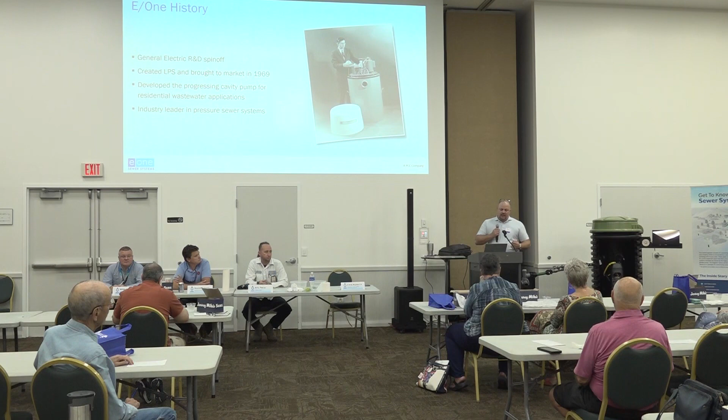We are recognized as the industry leader in pressure sewer systems, but I just kind of want to pause right here to not only point out that we have a national presence, but also an international presence. We do this all over the world. Our company is in 46 countries, I think now. Somewhere in the world, there's another brown bag event taking place where someone from our company right now at this very moment is talking to a group like yourself about pressure sewer systems and the benefits that they bring.

But there's three primary types of systems. Jenny alluded to it earlier. We've got pressure sewer, we've got gravity, and we've got septic, various forms of septic. And all three of those types of collection systems are present here in Port St. Lucie.

So just to cover kind of our mission as a company, we provide complete and accurate design recommendations for pressure sewer suppliers, engineers, and customers. So what that means is that we don't just provide a product and cross our fingers and hope that it works well. We work with the engineers, we work with municipalities like Port St. Lucie to make sure that we understand the application, to make sure that we're designing the system in a way that it can be optimized so that it's invisible to the homeowner.

Having been doing this for a number of years now, it's not uncommon for me to get a phone call from an end user, because our name and information's right on the website, but a homeowner might say, hey, I built this house back in 1990. I had no idea that it even had this pump system. That's not a good call because there's a service issue. We never want there to be a service issue, but it's good that it's been 3 decades and it has not caused an issue whatsoever.

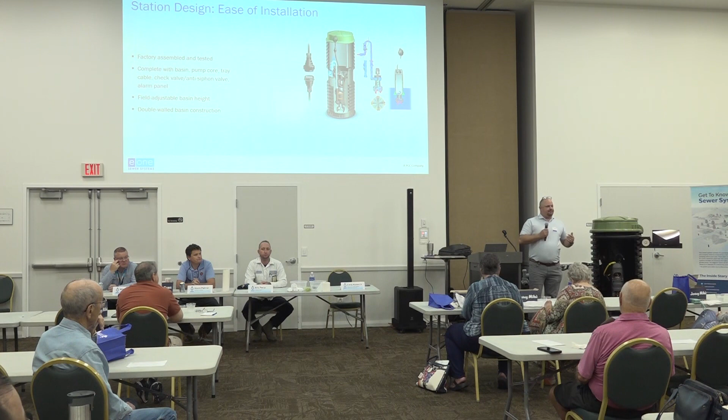We spent a lot of time and resources on oversight of installations as well. We've got Joe Papadakis. I see your hand there, sir. I'll get to you. Joe Papadakis is our local liaison to the city of Port St. Lucie. He works a lot with contractors who put these systems in. So there's a question? Where do you manufacture? New York State. Yep, New York State, upstate New York, from day one. Still made here in the USA.

Also, serviceability. We want to make sure that whoever's servicing this entity can do it in a cost-effective, efficient manner. And we want to make sure that simplicity is part of every aspect of the design. So in many cases, it's the utility or the municipality that does the service work. In some other cases, it might be a private contractor or it might be a plumber.

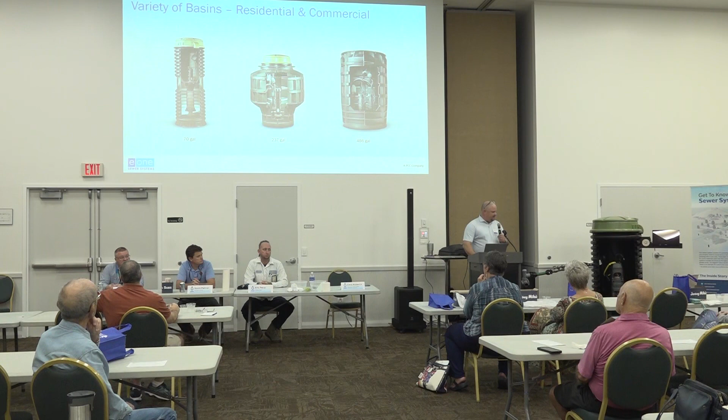In all three of those cases, we want to spend time with the service entity, educating them on how to do it the right way and making sure that everything is as simple and predictable as possible from an oversight standpoint. We make a variety of different basins for commercial applications. This simplex residential unit is what's used here in the city.

And we have a lot of protective functionality for our panels as well. Things like surge protection, lightning protection, brownout protection, overpressure protection, all those things are featured on our panels. And one of the really cool features that we've come out with in the last 5 years or so, 7 years now, is the advisor system. It's a remote system, an alarm system that notifies the service entity of an issue with the pump, often, if there is one, prior to the homeowner even being aware of it.

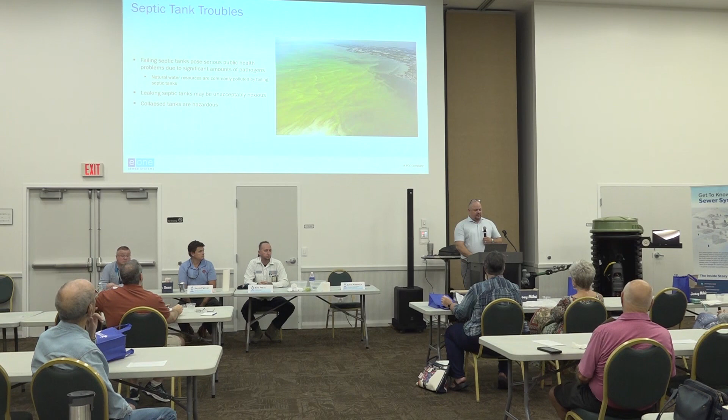Why do we look at septic to sewer? Why do we look at using pressure sewer as a means of solving water quality issues, which we hear about every day in the news? We know in the state of Florida and beyond, leaking septic tanks are leading to algae blooms and water quality issues. If you open up your phone or the television, you'll see on any news outlet, water quality issues are now really front and center. We're hearing about them on a daily basis.

Pressure sewer systems are one of the most cost-effective and efficient ways to deal with leaking cesspools and septic tanks. In the city of Port St. Lucie, how many septic tanks are out there that still have to be replaced? 14,000. Just under 14,000. And 4,000 that are in close proximity to a waterway. So those would be considered targets for a pressure sewer system as well.

So I want to just deal with some of the myths and misconceptions as we're wrapping it up. We have to go a little bit quicker here. There's a lot of content, so apologies for that. But just hitting the high points with gravity sewers, one of the myths and misconceptions is that once they're installed, you don't have to ever maintain them. These gentlemen will talk more about what they do to maintain that system. There's lots of regular maintenance required with them. Lots of costs required with them.

You also have some vacuum sewers down here in this part of the country. One of the misconceptions is that they're sealed with no infiltration, that they're simple to operate and troubleshoot, and that multiple homes can share a valve chamber. With pressure sewers, one of the myths and misconceptions is that constant maintenance is required. This is not the case with an E/One system, and that it's expensive to operate. We know through third-party data that for about $30 a year, you can own and operate an E/One system, which is markedly less than any other type of collection method out there.

So with that, I'll leave it open to any questions that you folks might have. Yes, sir. No, it has a backup generator that can be hooked up that would evacuate the station. In the case of Port St. Lucie, they take responsibility for that, and they do a great job with it. Budget price for something like this, for the equipment, say about $7,000.

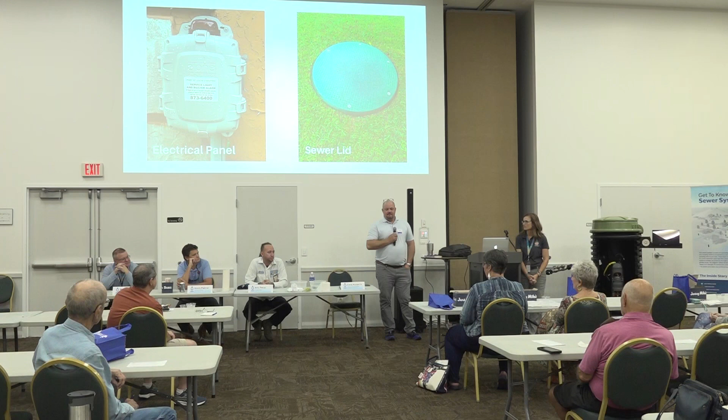Well, thank you very much, guys. Appreciate it. Thank you so much. Safe travels. So we got to get Chris out of here. He's got to catch a flight. So, all right, let's see here.

All right, so real quick, I know that we're eating. I feel like most everybody's wrapped up, but we're going to do a quick flush test. So hopefully everyone is aware of what you should flush and what you shouldn't flush. Obviously, we know what we should flush, right? Okay, cool. I talk to kids a lot, and they love when I talk about what you should flush, but I'll spare you folks here today. So we're gonna do a quick flush test, okay?

So I've got my 2 toilets up here, my two bowls of water. I'm gonna show you what happens when toilet paper is flushed. I'm gonna simulate a flush with a whisk here. And this toilet paper, just with a few whisks, is doing exactly what it should be. It's breaking down, right? I put about 3 squares in there. It's not squares anymore, right? It's like a little snow globe in there. That's exactly what toilet paper should do.

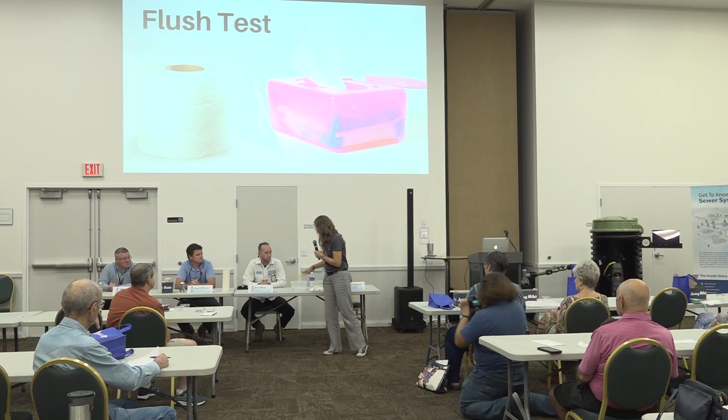Now we're going to talk about flushable, in quotes, flushable wipes. So I've got my flushable wipe here. I'm just going to show you what happens when I flush this wipe. Oh, I got to flush it again. Hang on. Not much happening. It's not breaking down like the toilet paper did.

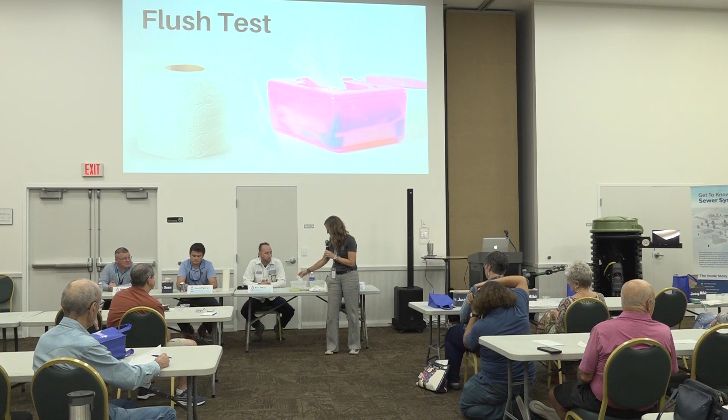All right, I'll show you a magic trick. Now these have been in my display box for a long time, so we'll see if it works. But abracadabra, still intact, folks. The label says flushable, and it's right. Technically, this is flushable, but so is my wedding ring, right? So is a $20 bill. You can flush all kinds of things, but will it break down? And the answer is no.

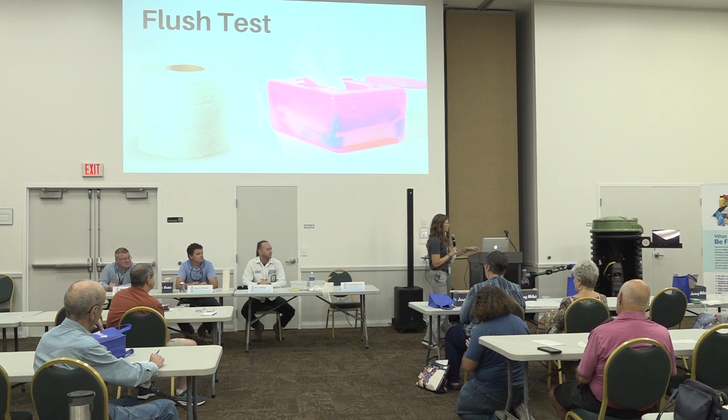If you guys leave with any information today, please just remember, don't flush these, no matter what the label says. We've got a list up here in case you want to take a picture of it. That's everything that you should not flush. So this was a couple years ago. Remember COVID? Remember when we couldn't buy toilet paper and had to order it on Amazon? We tried to get ahead of it as much as possible because we knew that with people not being able to buy toilet paper, they were going to turn to these.

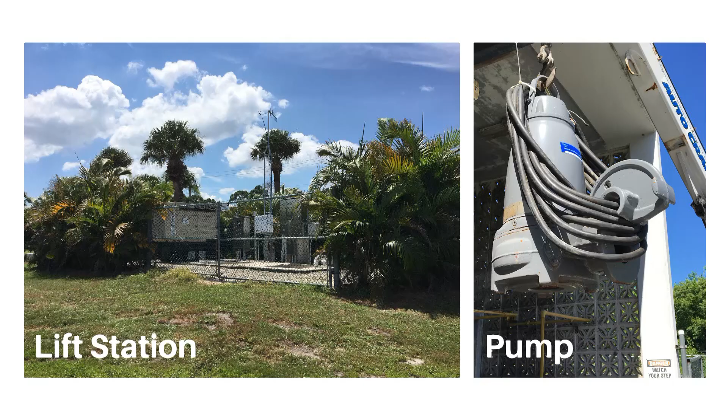Lift station. Thank you, Jenny. Just a quick brief about me. My name is Eric Perez. I've been with the city for 23 years, and 18 of those I've worked on lift stations. You might know a lift station if you're driving through a neighborhood or walking your dog. It's usually a fenced-in area with a driveway and an electrical panel with an alarm. Sometimes it might smell a little funny. Sometimes it doesn't, and that's some of the odor control that we try to have.

To the far left is what the panel looks like along with our communication. So if there's a failure within the station, it will let us know, usually through a text message or an email. All the sewer lines within the city, whether low pressure or gravity, go to a lift station. It fills up to a certain point, and then it pumps down to the next lift station, and so forth until it makes its way to the plant.

Things about a lift station: generally, in the Tradition area, our deepest lift station is 32 feet. We have roughly 315 lift stations throughout the city. If you have a septic tank, it doesn't go to that. Just the gravity sewer and the low-pressure systems go to a lift station. And same with the wipes. We have trouble with wipes. They get jammed up in our pumps.

Generally, in a lift station, we have 2 pumps. The best way to describe a lift station is it is very similar to this. Usually we just have 2 pumps in there, varying in sizes from 5 horsepower up to 50 horsepower.

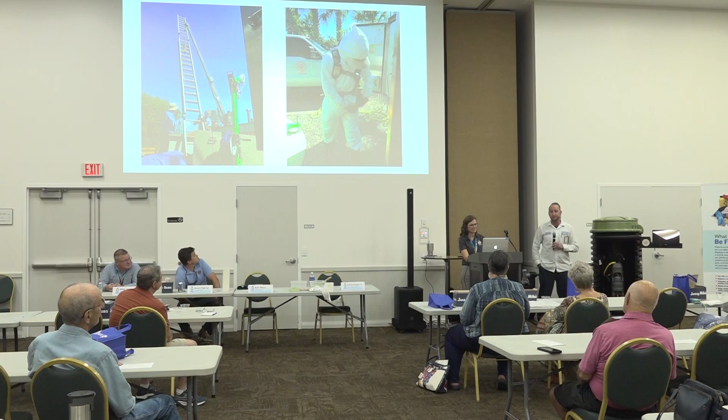And once it fills up to a certain level, then it pumps out into the main and further on down the line to another lift station, and so forth. And then it makes its way to the plant. Some of the things we deal with are a lot of wipes, grease, stuff like that. Same stuff that can't be flushed still makes it to our lift stations eventually if it gets past the residential system. As far as gravity goes, in my opinion, it's always been the favorable system we've had. It has less failure in general, but it's more economical to do a low pressure system in the state of Florida because of our high water table.

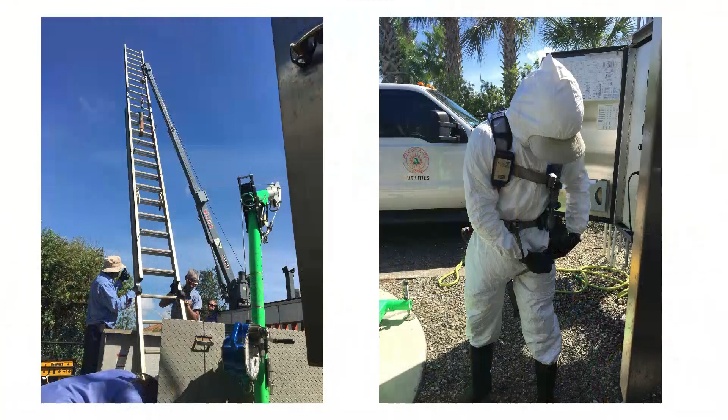Okay, so this is me. Yeah, that's me, I'm going into the lift station to make a repair. That one was actually about 28 feet deep. I don't recall what the repair was, but generally what's called a discharge leg, where the pump will push the fluid up and out into the main, will have a failure, and we need to go inside and make a repair. Sometimes we have to go all the way down to the very bottom, or sometimes we go to the top.

So when the lift station fails for whatever reason, a neighborhood can have a slow backup. Absolutely, yes. And all the neighbors may say, hey, I'm not flushing, right? That is correct. So it can happen in a neighborhood, it could back up an entire neighborhood, yes. And then it's just a matter of time before it gets repaired and everything's back to normal, business as usual. We try to make that as prompt as possible. That can be a big disaster when that happens, so we try to be as speedy as possible.

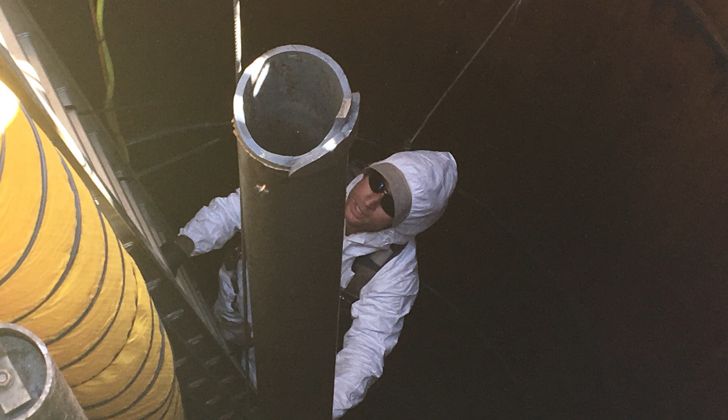Yep, there I am dangling. That was the entire discharge leg we ended up taking out of the lift station to make the repair. And that photo does not do justice to just how deep it was. You said 28 feet deep. Yeah, that one was 28 feet. I took these photos and

It's really a tough job. So my goal with these is for you all to leave with a real good appreciation for what these employees do and what they have to go through on a daily basis. I mean, 315 lift stations all over the city, and you're certainly not the biggest division, but you guys work 24 hours a day. Weekends, holidays, there's always someone out there working on these things to make sure that when you flush, it goes away and you don't have to think about it anymore. We do all the work that nobody really gets a chance to see. That's a good thing.

How many homes does each lift station support? On average, every lift station holds at minimum 1,000 homes typically. And you have a maintenance program for them? Yes we do. Do you respond when there's a problem? We have a preventative maintenance program where we service every lift station once per year, and then as calls come in, we respond and do the maintenance on them.

The lift station on Rosso, and I think it's Cameo or something right near there, it never used to smell, and now it'll constantly have the odor coming from it. So that's Rosso and where? Correct, there's two on Cameo, yeah. Crosstown? Okay, we'll address that for sure. Thank you for bringing that to my attention. Rosso and Cameo don't cross, so I'm trying to picture where you're talking about.

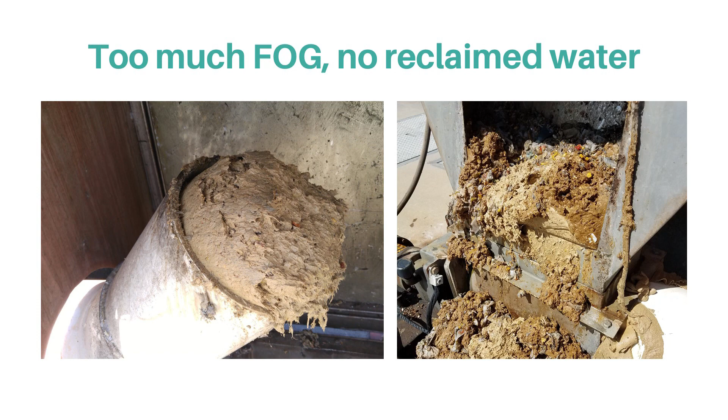So why do we do this? Why don't we just allow this stuff to go down the drain? Well, we don't want things like grease and baby wipes to go down the drain because they would clog the pipes. Then the sewage can't make it to the wastewater plant, and the sewage ends up on the street. Nobody likes that, right?

So you saw Jenny with the wipes. This is what a pipe looks like with grease in it. The grease and wipes mix together and form a clog. If all that stuff enters the sewer system, the pipe blocks and it overflows through a manhole or some other means, and the sewage is on the street - it's not nice to live like that. So that's why we do what we do.

Also, we want our wastewater to make it to the wastewater plant. Mike's going to talk about this. We want the wastewater to make it to the plant so we can treat it properly, and then make reuse quality water, which we use for irrigation, so it helps the environment.

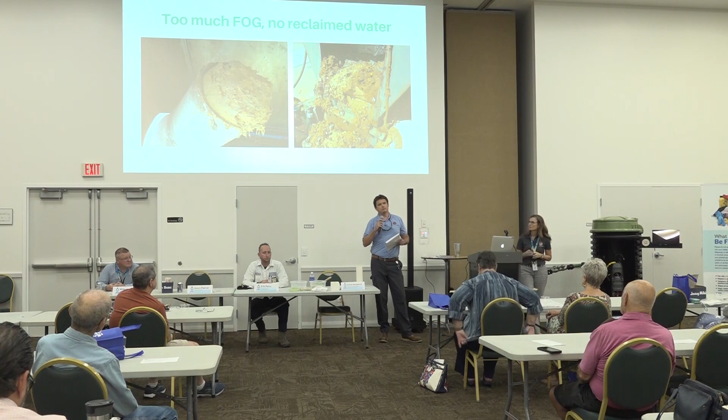Let's see, what else? We don't want industrial waste to enter our sewer system. Why not? Why don't we want silver, acids, bases, or cyanide to enter the sewer system? Well, eventually those pipes end up at our wastewater plant.

And what is a wastewater plant? It's basically a huge biological process. That's how your waste is treated. It's basically just bugs and bacteria in a solution getting aerated around, and that's what treats your sewage. So if we were to pour silver, acid, or gasoline down the drain, it would kill all those bugs. It would kill all the animals.

It would be unfathomable to have 10 million gallons of untreated sewage that we wouldn't know what to do with, because somebody poured gasoline down the drain or something like that.

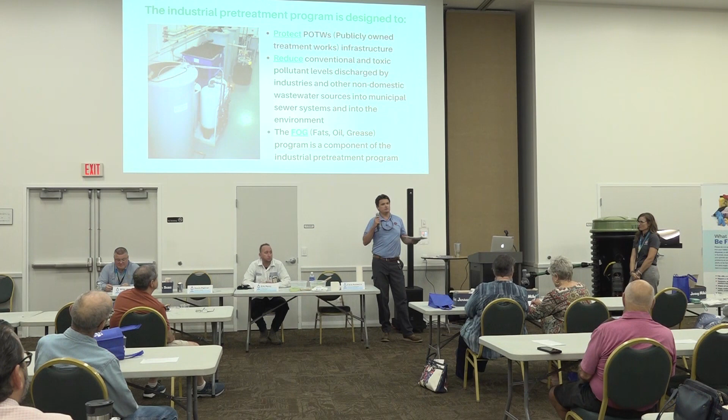This is some pictures of how they pre-treat waste. They neutralize acids, or they'll use chlorine to neutralize cyanide. It's various processes.

And we use this for residential. For residences and houses, we can't regulate what you do in your house. So what we do is have a used cooking oil collection event. Twice a year, you can save all your cooking oil and bring it to us, and we'll recycle it. It gets turned into biodiesel.

So we've done this for how many years now, Jenny? Since 2020. Every 6 months, you can come to our public works facility on Thornhill and give us all your used cooking oil, and we'll recycle it. That's been very successful, and that's how you can help our sewer system by not pouring grease down your drain.

On the commercial end, I know that there are some providers out there that will come and bring the big drums that restaurants use for oil before it goes down, even if there's a grease trap. I do commercial property management, and I own commercial property with restaurants.

One of the things - as you're saying that's being used for bio purposes - would it be something the city at some point could do, to have collection themselves instead of these other companies that are sometimes not very reliable? Would it pay for itself to have that kind of program where you provided the drums, picked it up, kept stuff out of your plants, and you could make money from it? It just makes sense, like the dump does for their natural gas that they provide to Tropicana with it. Just a thought.

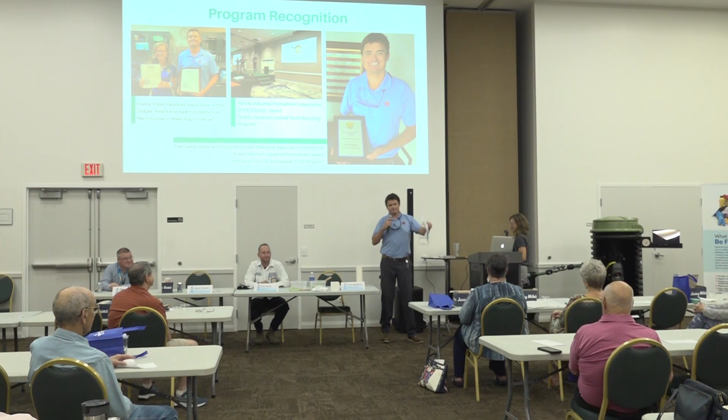And I'm just going to brag about Kevin here for a moment, because he won't, but he's been recognized by a couple different agencies for the work that he does for his pretreatment program. So it's just him. He's the only one. So how many grease interceptors? 1,480? 1,480. So just this guy, just him. So he deals with all of those. So he has a very good relationship. I mean, he's a likable guy, right? So he's not going to come in and yell at you, like he said. He's going to go in and just try to educate you and work with you as best he can.

But to your point, our Port St. Lucie Police Department is aware that sometimes there is illegal dumping, and there have been cases where a restaurant will hire a company to take this grease away, and they don't. They just dump it back into our sewer system. So we have worked with the police department so they know what that looks like. They know that if it's not one of our trucks, if it's not one of our uniformed employees, they are not supposed to be doing that. So the police are aware, because we have had problems in the past.

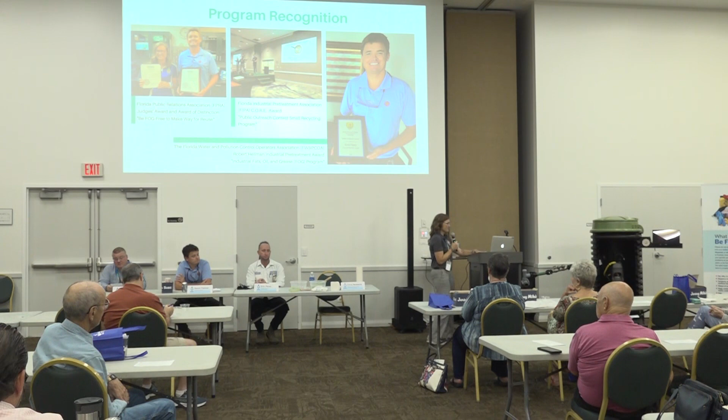All right, so the end of the line, Mike Jennings. He works at the Glades wastewater treatment plant, and he is going to talk about just what we do with all that wastewater.

I'm gonna stand here if it's all right. Do you want to click through the pictures? Sure. You want to start there, whatever's comfortable. Okay, thank you for having me.

So yes, I work at the Glades wastewater treatment facility. It's one of 2 treatment plants in Port St. Lucie. 350 lift stations, I heard, go to 2 large booster pump stations. And the booster pump stations send the flow to the Glades wastewater treatment plant or the Westport wastewater treatment plant. Everything that goes down the drain, from flushing the toilets to using the grinders in the kitchen sink to the laundries and the showers, makes its way to us eventually.

And it takes a while to go from lift station to lift station, because we have different holiday events when we have particularly high flows, and it's not instantaneous. So everybody talks about halftime at the Super Bowl. Everybody gets up and uses the bathroom, and you can see the tanks rise up on their own. Well, it doesn't quite work that way. It takes about a half a day for that to actually get to us, to travel from station to station. But eventually it does.

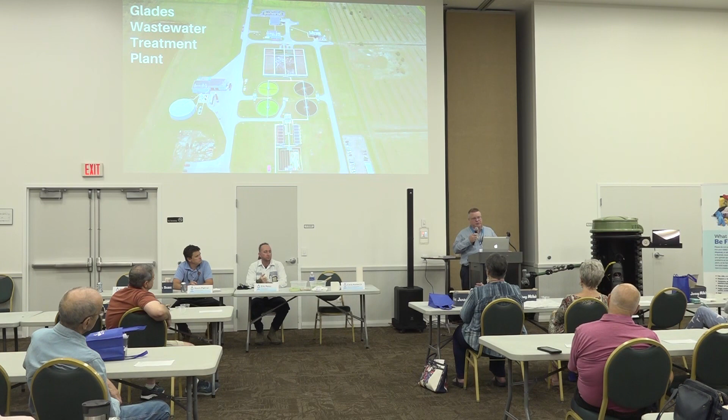There can be what's called pathogenic bacteria. So if there's disease in the community, that comes to the treatment plant. I'm from up north, the New England area, and up there the treatment plants discharge to rivers and streams and the oceans and lakes. They don't inject it underground like they do at a lot of places in Florida, or spray it on golf courses and other grass. So we don't want there to be COVID in there, or polio, or whatever else disease is in there. So we're trying to control disease-causing organisms.

And somewhat biodegradable material, too. Okay, so bacteria we don't want getting out. And then we treat for what we call solids in the system, which is coffee grounds and eggshells and sand and grit that gets in, and food particles, the things that we flush down the toilet. And so solids and biodegradable material is another thing that we need to remove.

And we have treatment standards that say we need to remove a certain percentage of what comes in and meet a certain concentration in terms of what goes out. So we measure how strong it is coming in and how strong it is going out, and we can figure out the removal efficiency of the facility. And by law, we have to remove 85% or greater of the biodegradable material that comes in or the solids that come in, what we call suspended solids.

And we do that with what you see up here at the Glades facility. I'm going to take you through step by step and explain what comes in and where we take things out. We don't really put anything in to treat it with. We do a lot of gravity settling. So we let gravity do its job. Things that are heavy are going to settle.

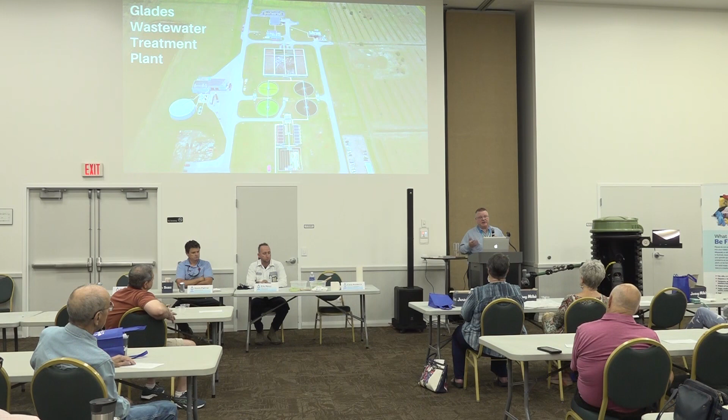And we grow a special population of bacteria that mimics what occurs naturally if that sewage was to reach a stream or a lake or something like that. We create special conditions to basically mimic that natural process, but accomplish it at a much greater rate. So we can speed that up, and it takes about 24 hours for water to come in the front and go out the back of the plant with all the different tanks that it needs to go through. So we'll step you through and explain a little bit more as we go along.

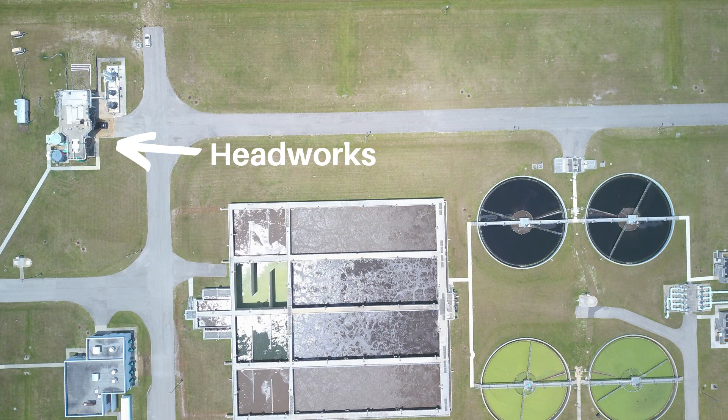There's two booster pump stations that feed to the Glades treatment plant. It comes into what we call the headworks. And it's lifted up in the air about 40 feet or so, so that we gain some elevation, and then it can gravity flow through a series of treatment stages. So we boost it up at the headworks about 40 feet in the air, and we have what we call a grit separator, and that takes out heavy particulate matter like coffee grounds and eggshells, debris that gets in there.

It goes through a bar screen too, kind of like a kitchen colander, where we can separate out things that are readily separated out, like wipes. You can't really see it in the picture, but there's a 10-yard roll-off dumpster there, and we have to empty that twice a week because of all the flushable wipes that we pull out and everything else that goes down the toilet, if you think about it. So we take out the gross contamination through this colander type device. And then we take out the grit, which is the sand and things like that, and that goes in the dumpster and off to the landfill as well.

After the headworks, it goes into what we call the activated sludge aeration basin. So we take that material that's been screened, and it goes into these tanks, and we feed it oxygen. We blow air into it because we want aerobic bacteria that grow in the presence of oxygen to consume the biodegradable waste that's in there. So anything that, if you were to send it out into nature, would break down on its own through the action of bacteria, we've got a factory up there of bacteria that are doing nothing but breaking down the biodegradable waste.

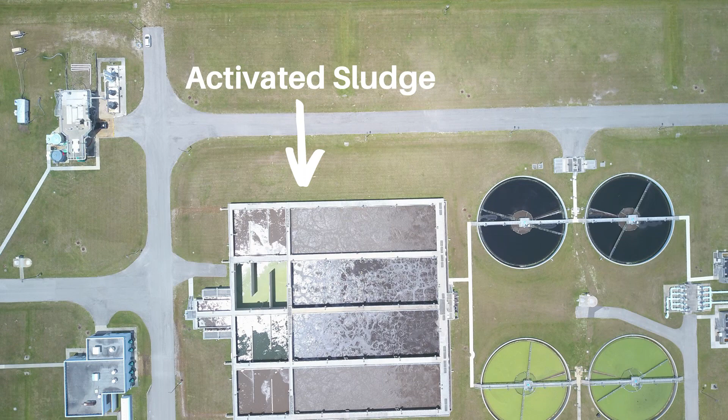So in the middle, you can see the bubbling action that's going on, and that is providing the ideal environment to grow organisms that want to consume biodegradable waste. It's bacteria, basically. And it mimics what goes on in nature, and we just do it very efficiently. And that way there, we can reduce the concentration of the biodegradable waste that comes in and meet our treatment goals.

In terms of solids, because it's an easier number to understand, I brought one with me, I think. Nope, I changed my shirt, I'm sorry. I had an example of a special filter in there that we use to be able to measure the solids with, but I actually was doing some work and got a little dirty. I put a clean shirt on when I came here.

We filter the sample that comes in and measure what we call suspended solids, and we can calculate the concentration of that in milligrams per liter. So it's about 200 milligrams per liter of suspended solids that comes in. When we're in the activated sludge stage, we're growing all these organisms and bugs and things like that. It goes up. Believe it or not, we increase the solids in there, and we take it up to about 3,400 parts per million, or milligrams per liter. And that's all the bugs in there, bacteria, breaking down the consumable waste. So you think that we drop the concentration, we actually raise it in our little bug factory.

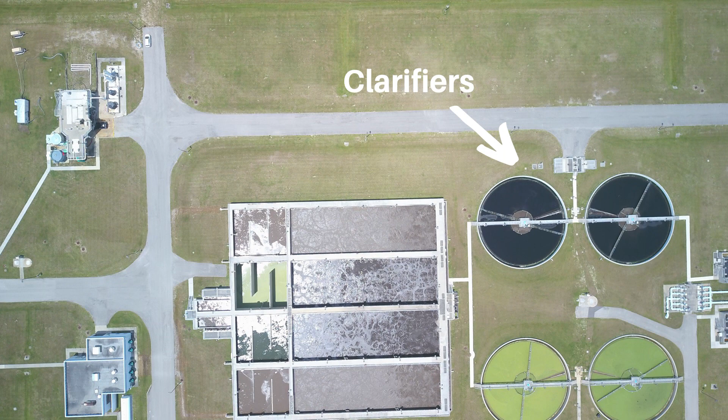So out of the back of the aeration basin, it goes to a clarifier. So using the solids analogy that we had, we were talking about 200 milligrams per liter. Out of the aeration basin, what we call a mixed liquor is about 3,400 milligrams per liter. And then we put it into a clarifier, which is a vessel that allows things that are heavier than water to settle to the bottom and things that are lighter than water to rise to the top. And what's on the bottom, we can circulate off and pull off as a thickened sludge. And then we take that clear water. I'm going to show you a picture of the clear water that goes over and on to further treatment.

Going into the clarifier, it was 3,400 milligrams per liter. Coming out of the clarifier, we take it down to about 5 milligrams per liter. So it's very efficient. What we want to do is grow a population of bugs that will flocculate, which is come together and link up, and then they get bigger and heavier, and they settle faster. So we want them to settle out. And then we put some of that material back into those aeration basins to keep the process going, because we have a target level for how long we want those solids and those organisms to be in the system. We run the plant right now so it takes about 11 days before those bugs would be replaced with new bugs.

So going from 200 milligrams per liter coming in to 5 milligrams per liter leaving the clarifier is, I did the math, where did it go? 97.5% removal. So we can remove 97.5% of the solids just by blowing air into the water and allowing it to separate out. Okay, so we need to meet 85%, and we're well beyond that, so we do a really good job. But we're not done.

These jagged teeth are called weirs, and the water flows out over the weirs and the edge, and you can see in that trough right there, that's what it looks like at about 5 milligrams per liter. So with nothing other than blowing air in it and gravity separation, we've removed a great majority of the pollutants. Not so much the pathogenic organisms, but the pollutants. The biodegradable and solids. There's another picture, looks pretty good.

When it's really hot, you want to get in it, but then you remember what it is, and you don't.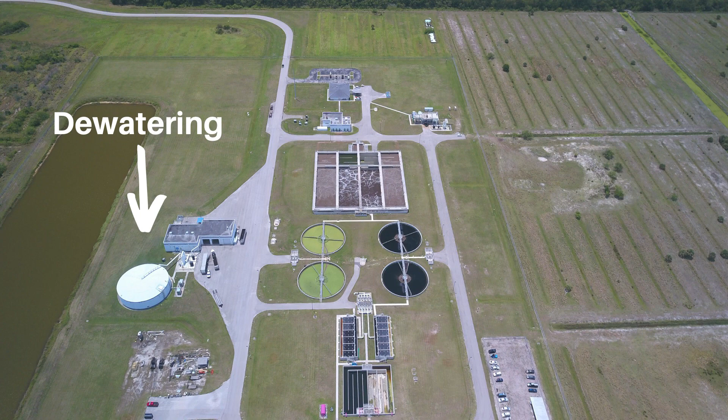We take some sludge out every day, because if we didn't, the plant would fill up with it, and it goes to the dewatering facility. That's a 1 million gallon tank, and we have a couple of centrifuges in the building behind it, and we spin out the water through the centrifuge so that the material that goes out to be composted is about 20% solids and 80% water. So that's what dewatering is, taking the solids out and then thickening them up. And from our facility, it's 3 to 4 tractor trailer loads per day going off to a composting facility.

And where is that? At the dome? No, I think it's in Clinton County. I don't know. We contract with a company that takes it away, and it either goes to a landfill or a composting facility. It's currently going to a composting facility. I'm just not sure where. Again, it's a third party that handles that for the city. Yes?

Minerals? We don't really remove, I'm sorry, inorganics like calcium, magnesium, things like that. That will tend to either stay in the system and go out with the effluent, or possibly get linked up with some other things based on the chemistry as the pH changes. There's a whole lot of science that goes into that on the chemistry side. We don't really do any chemical manipulation. They do that at the drinking water facility. We're basically physical and biological treatment.

Yes? What type of educational background does it take to do the kind of work you do? So you have to be a certified operator in every state. Every state has a certified operator requirement. In Florida, you have to have a high school diploma, and you have to pass a certification exam. So I'm a grade C operator, and there are A, B, C, and D. A is the highest. And then there's a certification exam that you need to take, and then you have to gain experience to actually qualify for the license.

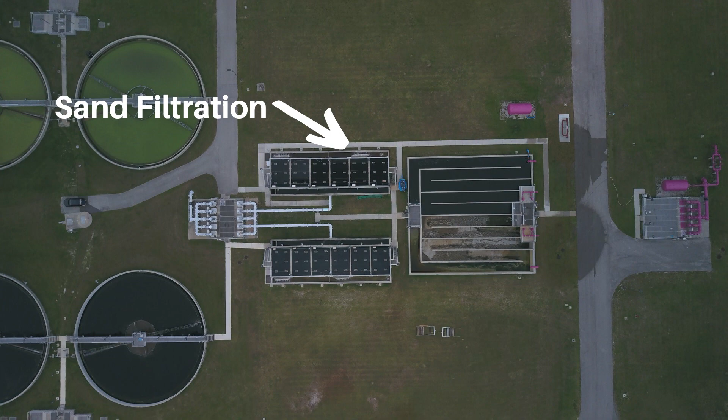irrigate with. So the sand filter takes it from 5 milligrams per liter solids down to usually about 1 milligram per liter solids. And that is a 99.5% removal of the solids that come in to the solids that go out. And it's basically like an aquarium filter. We just put the water through, almost think of it like coffee grounds. You know, we percolate through from the top to the bottom, and what comes out on the bottom instead of coffee is just a much cleaner product. That's a picture of it right there. Like I said, down to about 1 milligram per liter on average.

We don't, no, because the drinking water facility probably does, but for us, we just need to get that number down. We use another meter to measure it. That's a surrogate for solids. It's called turbidity, and that's how much light diffuses through it when you shine a flashlight through it or a special wavelength light. And we have to be below 2.5 standard units on that for it to be considered reclaimed water and able to be used. Not yet, no. Although there's a big story, they're doing that in Phoenix, out west where they don't have a lot of water. They're doing direct potable reuse.

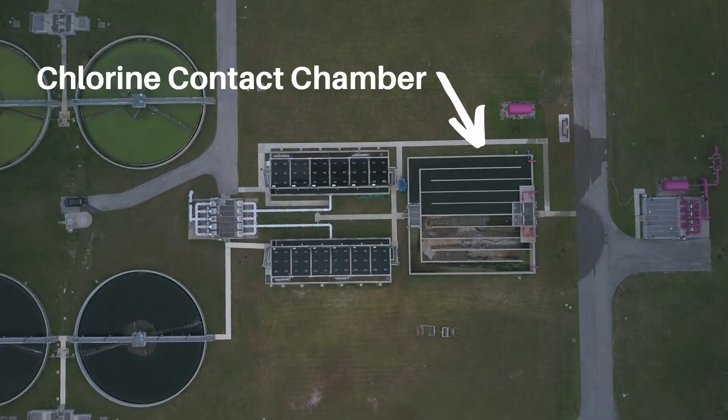Because we're still concerned about pathogens, we do disinfect it. So we treat it with chlorine gas, and that kills off any organisms that might still be in there. And we test daily for fecal coliform. The lab comes in and collects a sample, tests for fecal. And this is the contact chamber, it has a 30-minute detention time, so when we apply the chlorine to it, it takes it 30 minutes to wind around through those channels, so there's contact time to get the pathogen kill that we're looking for.

Is there evaporation? I'm sorry? Any evaporation problems with this? I'm sure there's evaporation going on, but that's good. That's less that we have to get rid of.

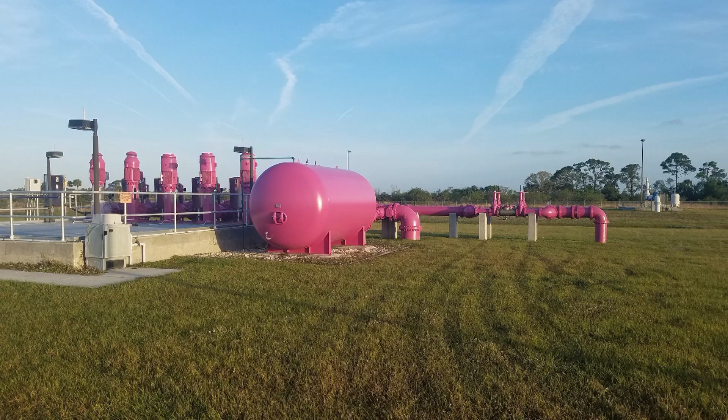Reuse. So it goes down to this station here, and when eventually our clients are hooked up and we're going to sell our effluent to them, it'll be from this basin. That's the pipe that goes all the way to the right into the ground. And then the first one that goes down behind that big Pepto-Bismol-looking tank is going over to a well in the back. We actually pump it 3,000 feet underground to get rid of it right now. So instead of sending it out into a surface water body, we have underground injection. But when Copper Creek and a couple of other developments come online, they will be receiving our reuse water for watering their grasses and golf courses.